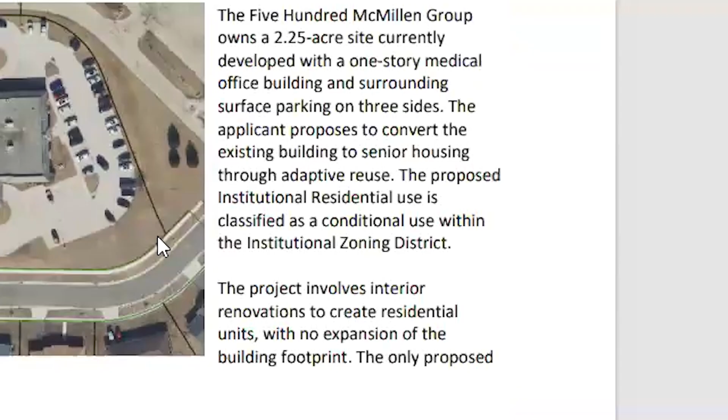Good afternoon. This is the 500 McMillen Group that owns this building. Applicant Mike Forrester is proposing to convert the existing building, which was previously pediatrics and internal medicine healthcare, now vacant, into senior housing, which is allowable as a conditional use in the institutional zoning district.

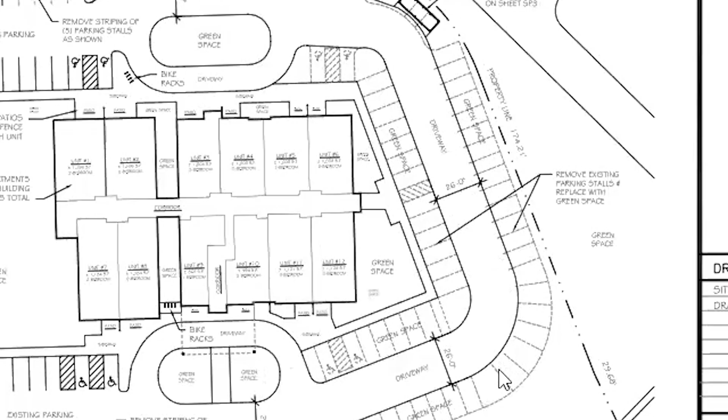All these proposals that come forward need to go through a few questions pertaining to how this proposal will work with the surrounding neighborhood. Of those questions, staff found that this is a cohesive type of reuse of this building for the surrounding area and does fit with the comp plan's proposed uses for the area as well.

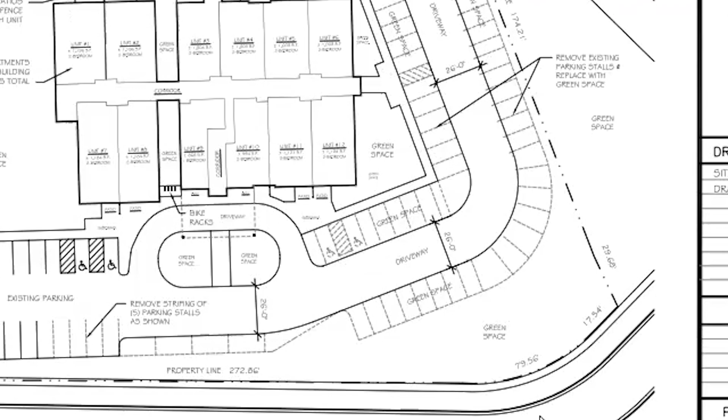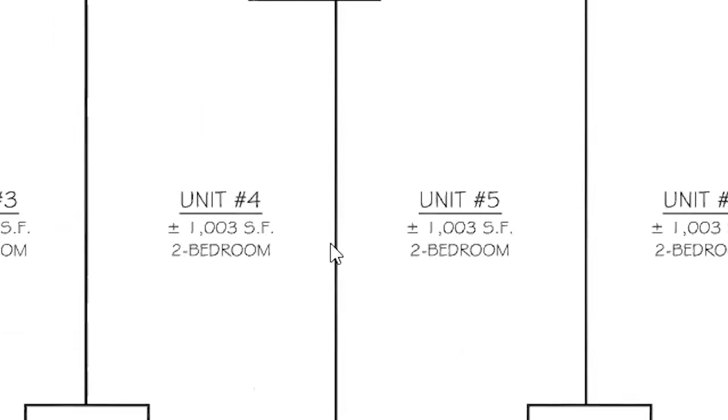The building itself, they're proposing to convert the existing doctor's offices into apartments. 12 apartments are proposed. Of those, 11 are two bedrooms, with one unit as a one bedroom. The two bedroom units are 1,000 square feet or greater, and the one bedroom unit is 868 square feet, all meeting the ordinance for minimum unit size for this zoning district.

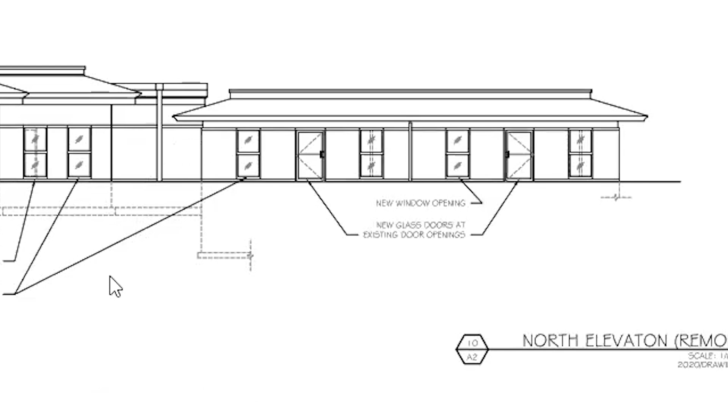If you look at the elevations, you can see there'll be some slight changes to the outside regarding the windows and doors, so that each unit will have a patio entrance as well as additional windows. There will also be a vinyl divider giving some privacy between the units. The exterior does, to staff, look like it'll be proportionate and harmonious with the existing building, which is a requirement as part of the zoning ordinance as well.

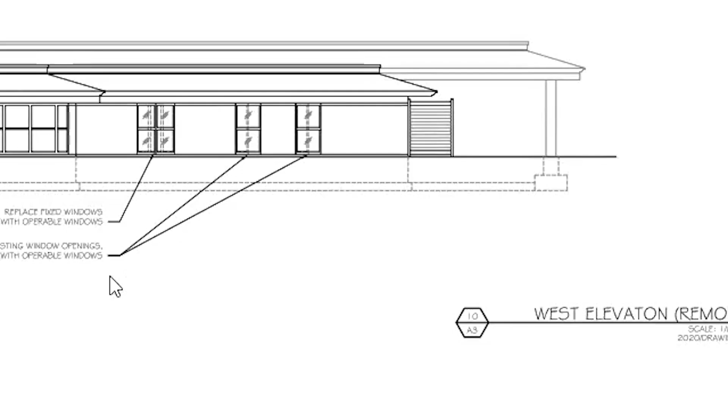As far as the site itself, currently the site has a great deal of paved surface. The applicant is proposing to remove a large portion of that while keeping a loop around for fire and EMS services to not have a dead end. So there will be a loop that will go around the rear of the building.

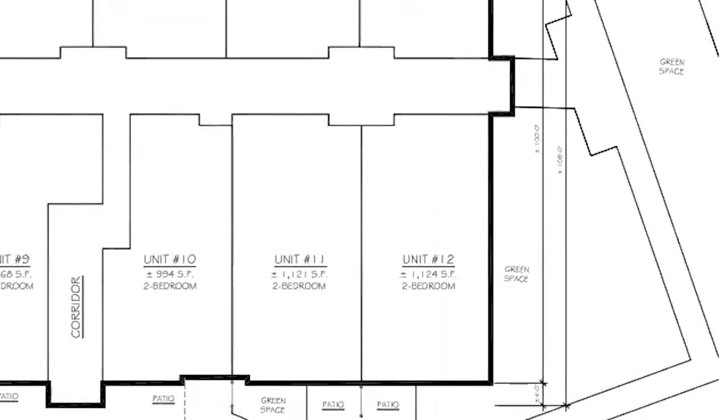There is currently 85 parking stalls. Under this proposed use, there will be a maximum of 15 spaces allowed. They are proposing to remove 57 spaces, bringing it down to 28 remaining spaces. Under the ordinance, the applicant can request additional parking spaces over the amount as part of this review process and approval. There is no approval today, but as part of the approval, that could be granted with the request.

After asking the applicant why they would want the additional spaces, they find with other developments that they have done that they need more than 15 spaces for 12 units. And the spaces being requested to remain are currently existing, so it would be less changes to the actual paving surfaces, being more cost effective for them.

Otherwise, it's meeting the majority of the site requirements as well as exceeding. There are 4 parking spaces for bicycles required; they have 8, 4 at each entrance. Pedestrian access is given at 2 locations. They will be proposing to install sidewalk all up and down along McMillen, which was nice.

And then changing out the blacktop aprons to concrete, which is part of city ordinance as well. On top of that, landscaping would not be required as part of this site plan, but they are proposing to add, by my count, 15 additional trees on the site, a mixture of evergreen and deciduous trees.

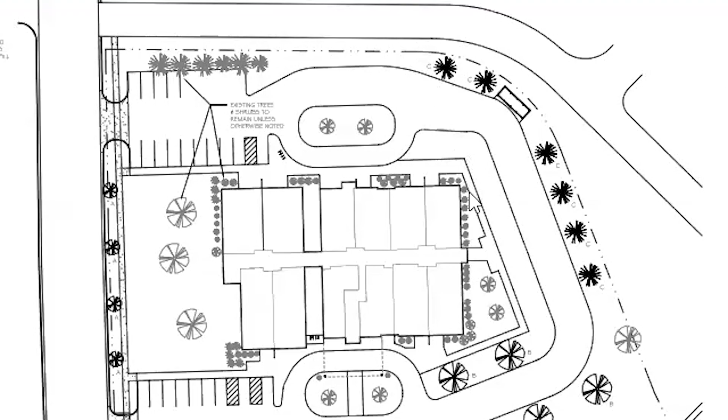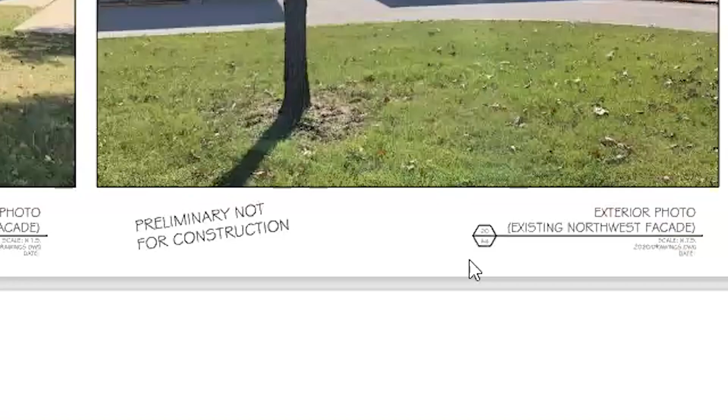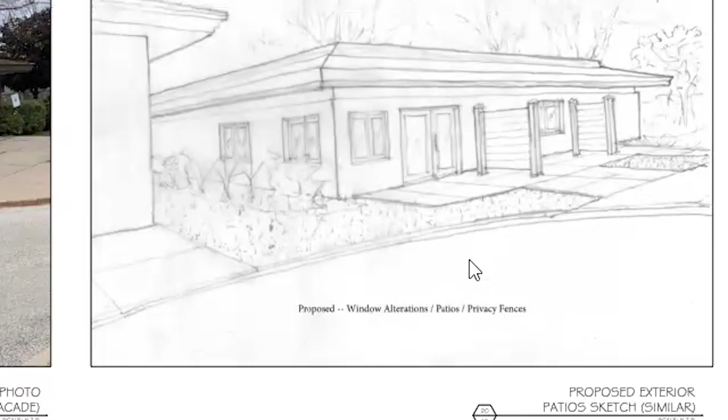I just noticed there to be some discrepancies between the elevations that are drawn on CAD and the hand-drawn sketch further down. I like the concept, I like making reuse of an existing building, I have no complaints at all about that, I applaud you for that. But to my eye, what looked like French doors or double doors going out to the patio, and what looked like side-by-side casement windows on the sketch, on the elevations look more like single doors, and what sort of look like double hung windows that go all the way to the floor. So I would just like some clarification on that.

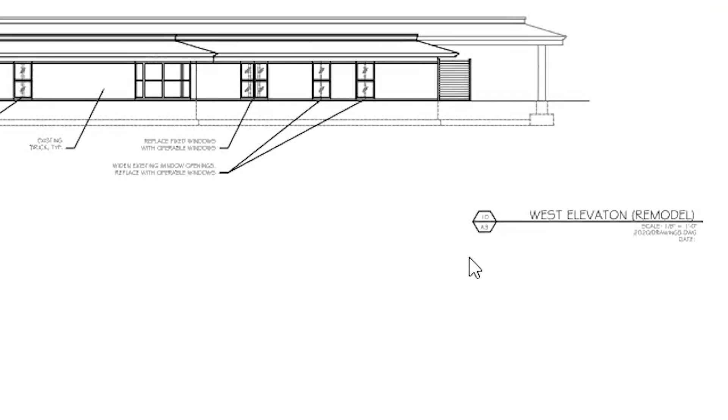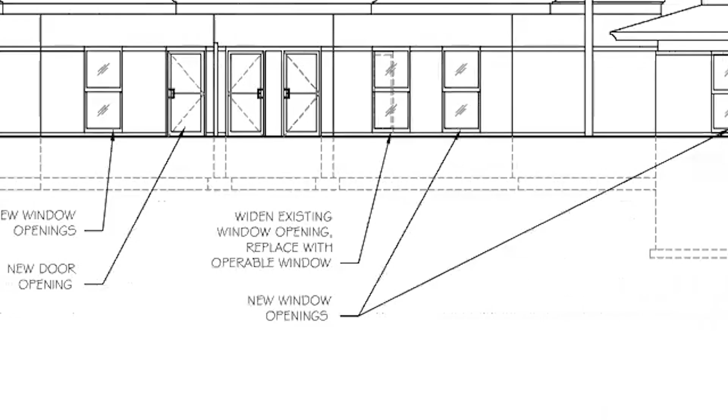I guess I'd have to wait and see which elevation we have. Do we have one that's listed as, I believe that would be south? Or scroll up just a little bit further. It's called northeast. Oh, it could be the north portion. They both have an overhang there. To my knowledge, they're planned to be the sketch down at the bottom with the sliders, I would imagine, but you would have to clarify that for me.

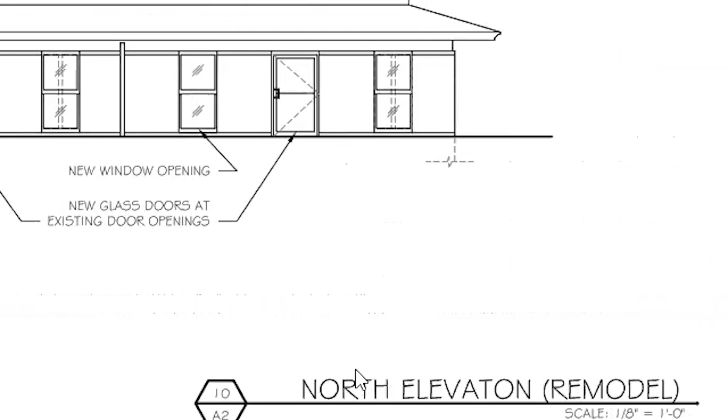Yeah, I don't know what you guys are pulling into. So what we'll do, I guess, is gather the feedback and then we'll have Director Drager take this back to the applicant so we can get more information and make sure that everything is accurately depicted when this comes back to the Plan Commission. So we can take that down, we can get that clarification. If there is a discrepancy, we can make sure that's corrected. I appreciate that. Thank you.

So just to make sure we're clear, we're talking about the sliders versus single doors going out to the patios. French slash double doors versus a single door, and then side by side casements versus double hung. Is what I'm seeing here would be single doors, as you said, and then double hungs is what? Right. Yep, so that's a good observation, we'll get some clarification on that. Thank you.

Well, one thing I do know is that this CAD drawing was done at a later date than the original hand sketch, after we asked for more precise elevations. So that's one thing I will say. The first one, speculative, but I believe that was more of a proposed, 'this is what we're thinking of doing.' When I asked for more detailed, then we got these elevations. So we'll get clarification.

Thank you. So Commissioner Kesnick, can I assume that your preference would be for the— do you have a preference either? I think the double doors would be nicer than a single door. I don't care if they're operable sliding versus swinging, just to again increase the light entering the space.

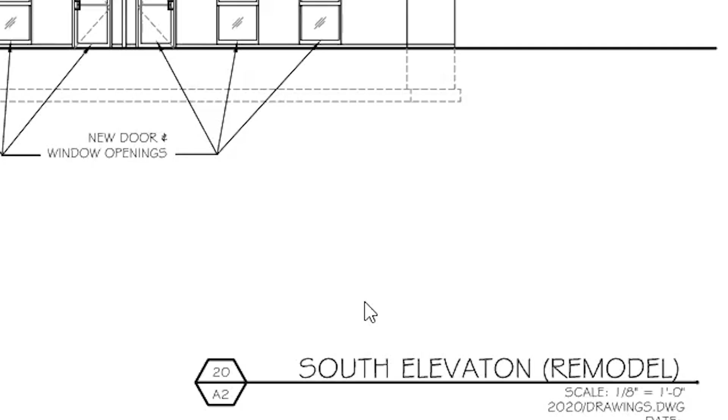Okay, thank you. Okay, anything else from the plan commission? Yes, I want to speak to the bike racks. It's good to see bike racks. Good to see twice as many as the city actually requires as a minimum.

Couple things. The city's guidance on bike racks is pretty sparse. The zoning code mentions inverted U's, and inverted U's is a staple shaped bike rack. That's a good thing. For security, the materials should be square tubing instead of round tubing. Round tubing is real easy to cut with a pipe cutter you can pick up at Menards. So that's number one. An inverted U bike rack in an array should be spaced 36 inches minimum to let

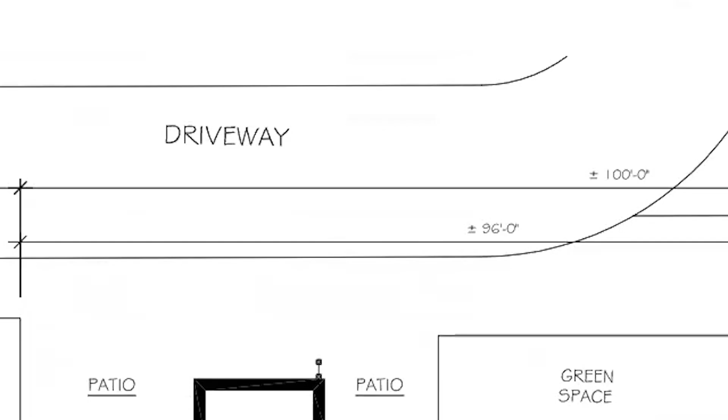bikes. It'd be great to see the bike racks crowded with bikes. I come from a place where there were a lot more bikes. I was Stanford University's first bicycle coordinator, thousands of bikes. So when you're doing inverted U's, if there's actually bikes parked on both sides of both hoops, 36 inches between the hoops is a good thing.

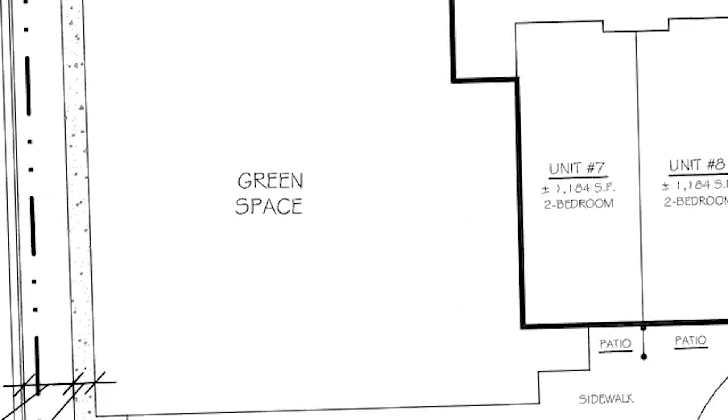As to the location on site, I see a set of 4 hoops on the north side and a set of 4 hoops on the south side. The south side hoops are in the entrance to one of the narrow green spaces between the larger wing of the building and the smaller wing of the building. And I'm wondering whether there's an issue there with fire needing to get in there and fight a fire that's on that indent in the building. So location of the racks.

The building's overhang, they have a substantial roof overhang there. And if racks were to be kept in that area, one option might be to tuck the racks against one of the long building walls and change them to diagonal racks. Diagonal racks allow bikes to be not 6 feet deep from the wall, but depending on the angle, 4 feet deep from the wall. So you'd still have access along the racks, even if they're loaded with bikes, and they'd tuck under the roof overhang for weather.

And then finally, a building like this in its previous state was a commercial building, so the racks would have largely been for visitors, probably not for the employees. But here we're in a residential use, so these seniors may be able-bodied seniors and want to have bicycles that aren't parked in their apartments.

So I see this indented green space, and there are two of them, as a potential place for a secured bicycle cage. So you might give some thought to locating a few racks behind a beautiful ornamental iron security gate so that the occupants wouldn't have to store bikes in their units, but they'd have some security overnight, especially if the bikes are valuable. So there's some opportunities there. Plus, you want to make sure that wherever you put the bike racks, they don't get in the way of firefighting.

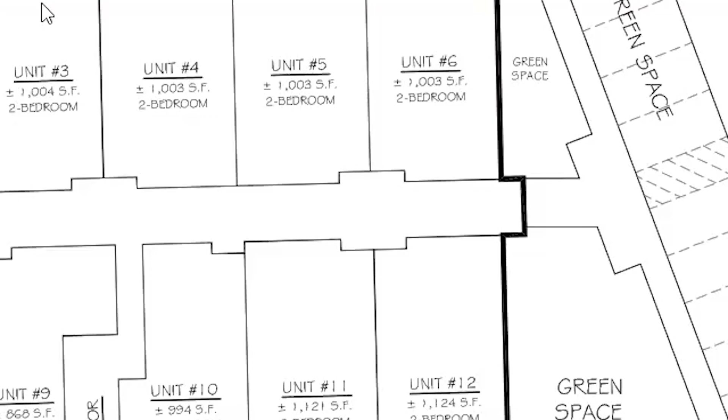Thank you. Anyone else from the Plan Commission? If you can zoom out a little bit on the plan view to see the connection to the streets. That big green space between McMillan Street and the building seems to me like it might be good for a kind of a semi-private yard if fenced. The building, the units themselves have tiny little patios, which are okay. That's what you've got relative to the driveways that are adjacent. It'd be nice if it was a clean slate design and you had a bigger parcel if the patios were little front yards, but that's not possible here.

That said, maybe this large area could be semi-privatized. It's a place for people to sit out and enjoy something fully visible to the public, but kind of an amenity space for the occupants. It's a good suggestion. Thank you.

Okay, just a couple comments. I appreciate the additional landscaping and the new concrete sidewalk. It has been a goal of the city to extend the sidewalk north in that area, and it's kind of intermittent, so this is a nice redevelopment opportunity to get that sidewalk in. We're supportive of that, as well as those sidewalk connections from the public sidewalk to the units themselves.

Anything else from the Plan Commission on this matter? Just to jump onto bike racks for a bit - if you wanted to remove the set between the buildings, a good place for them would be on the island with a walkway flanked by two green spaces. Just tuck them into one of the green spaces. That's a really good place - it's handy for a bicycle to change from rider to walker there, and it doesn't impact the fire access or anybody's patio.

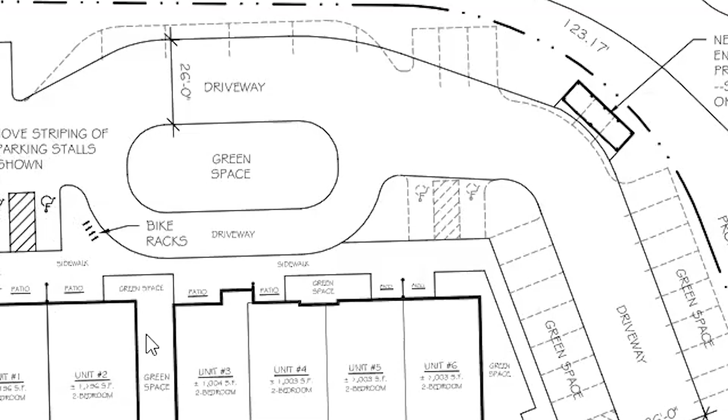I actually have a sort of out-of-the-box, semi-radical suggestion. I noticed that both the north end and the south end have a loop driveway, a drop-off driveway. If that was not deemed necessary, and if the handicap parking stalls could be resolved, it occurs to me that if you take the face of the building and draw a line all the way out to the back of that green space, you'd have room to put substantial front yards - patio yards - on each of the 12 units. Imagine if the two handicap stalls to the left are moved slightly out of the way, the near-side smaller width driveway goes away, and the line of parking stalls is extended across that entire area. Now you've got way more depth for the units' yards. That could be done on the south side of the building as well, and you'd still have plenty of parking spaces to push and pull for capacity while keeping handicap stalls close to the building. So rethink that extra branch of each driveway.

All right, thank you for that. Okay, thank you, Mr. Drager.

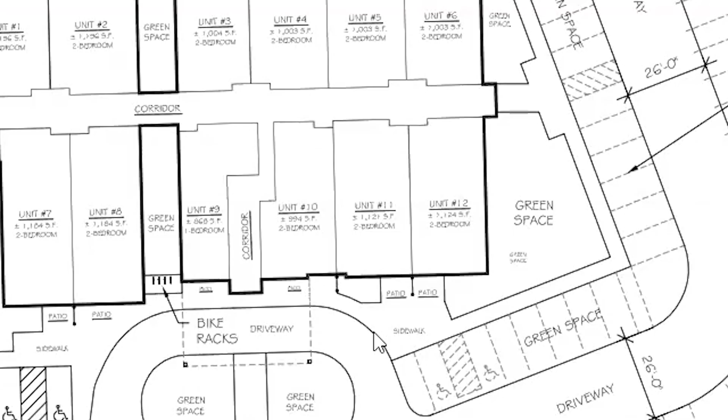We will move on to item 3B, which is review and possible action relating to the minutes of the December 9th, 2025 Plan Commission meeting. Has everyone had a chance to review the minutes?

Okay, hearing no issues, I would entertain a motion to approve the minutes as submitted. So moved. Second. We have a motion and a second. Any final questions or comments? Hearing none, all those in favor please signify by saying aye. Aye. Any opposed? Okay, that motion carries.

Item 3C is update on previously approved projects. I don't have anything prepared, but I'm happy to answer questions from the Plan Commission on any previously approved projects, or ask Director Drager to answer them for me.

I don't think I have anything. I will just note that over on Janesville Avenue in front of CubeSmart, they have removed a lot of the parking lot. That is not for a project at this point - it was part of the development agreement we signed, part of their planned unit development with CubeSmart. When they did the project, we required them to create two outlots, which they did, and then required them to remove the paved surface if they didn't sell them within three years. They had not, so they're removing that paved surface, and they're also installing sidewalk per that same agreement along Janesville Avenue in spring.